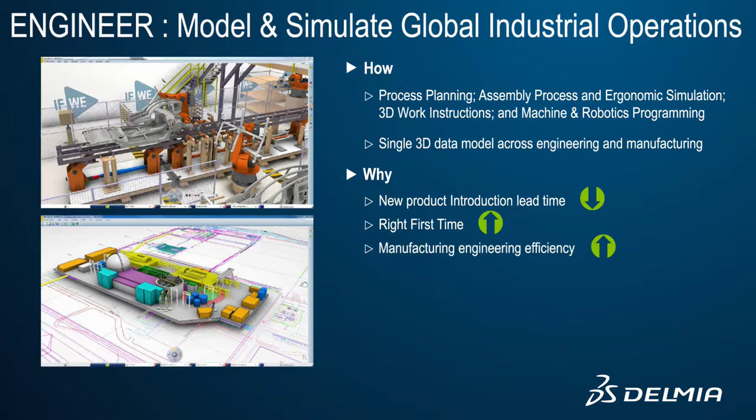This short video provides an overview of digital manufacturing capabilities enabling digital continuity. Digital continuity starts with virtual product design and continues through the production line.

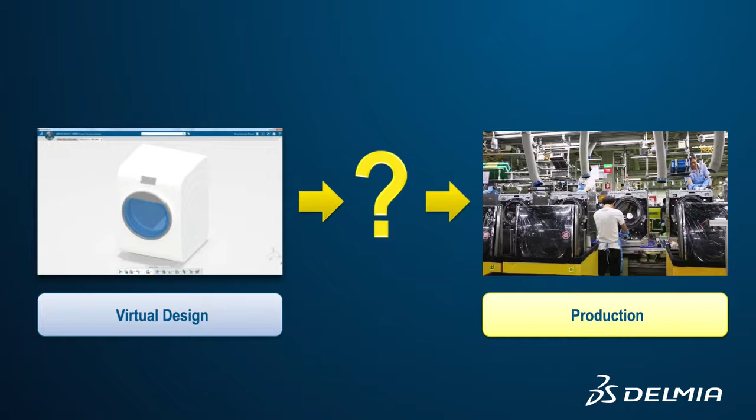Digital manufacturing bridges the gap between design and production by providing the tools to answer the key questions facing a manufacturing engineer. The manufactured item structure describes what to produce and delivers the manufacturing bill of materials.

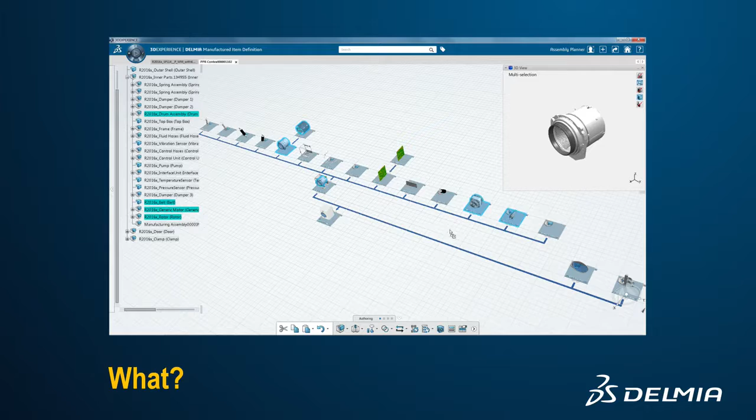The process plan describes how to produce all product variants with a detailed sequence of operations. The digital model of the factory and assembly line define where to produce. In this factory layout context, the process plan is validated with 3D analysis and simulation.

By providing a holistic and enriched solution with a model-based, data-driven digital user experience, each domain across the value chain, engineering and manufacturing, is empowered to drive agility and speed.

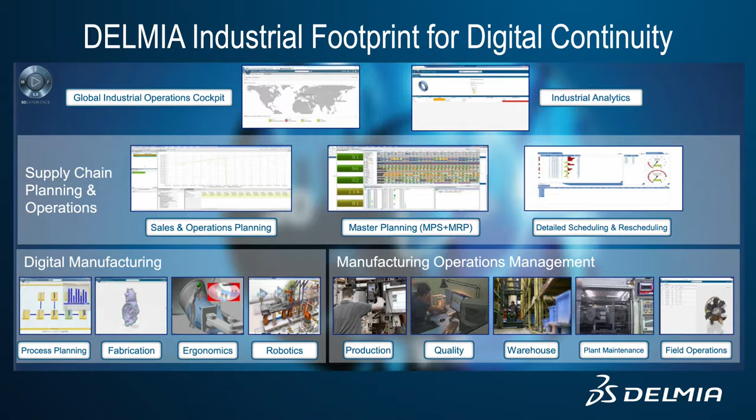Starting with engineering, we extend our world-class product engineering to world-class industrial engineering solutions for all industrial processes. This is called digital manufacturing.

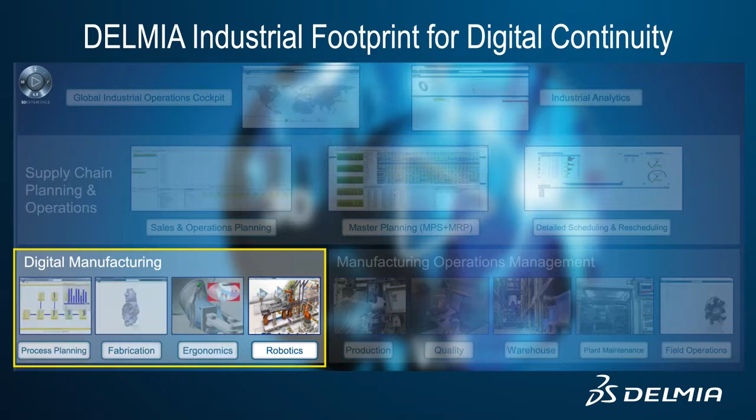Digital manufacturing covers four functional domains: process planning, fabrication, ergonomics, and robotics within the digital continuity paradigm. Starting with process planning, visual work instructions describe the product buildup with detailed assembly steps.

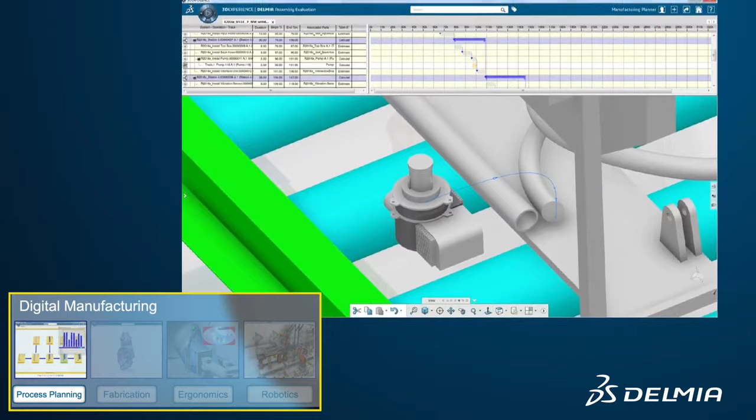Industry standard analysis methods provide accurate time calculation for manual operations. Line balancing maximizes resource utilization and optimizes the cycle time. Assembly simulation detects potential clashes and ensures manufacturability.

In fabrication, NC machine programming and simulation is used to create molds and elementary parts. Additive manufacturing is also used to create parts with industrial-strength 3D printers.

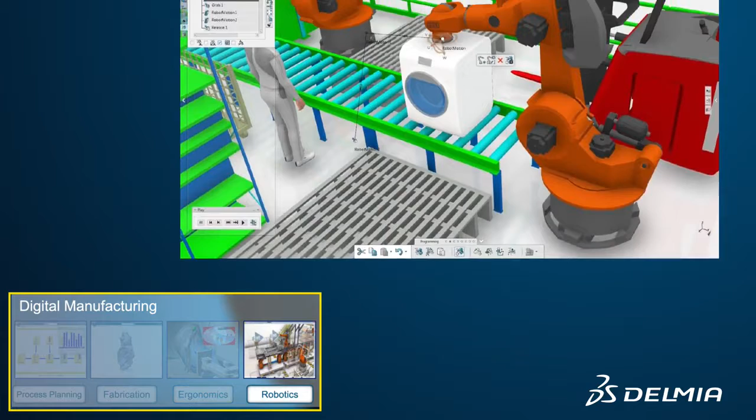Ergonomics analysis secures safe and healthy workplaces. Robot programming and simulation validates automatic operations on the assembly line.

Digital manufacturing delivers the MBOM, routings, work instructions, and machine programs, ensuring digital continuity to the production line. All design changes are detected and propagated downstream with digital continuity.

Dassault Systèmes' DELMIA brand helps global businesses reimagine their engineering, operations, and planning for manufacturing excellence.

DELMIA Digital Manufacturing is a key component of the overall DELMIA manufacturing solution, delivering digital continuity through a collaborative platform for global industrial operations, by creating connectivity from the physical world of edge computing to big data analytics.

Bringing together the virtual and real-world model, so that you have consistency between what's happening and what's possible, to reimagine your business across all time horizons, from long-term planning to real-time execution, ensuring the right decision can be made at the right time, empowering the user experience with comprehensive decision support and confidence to move with agility and speed.